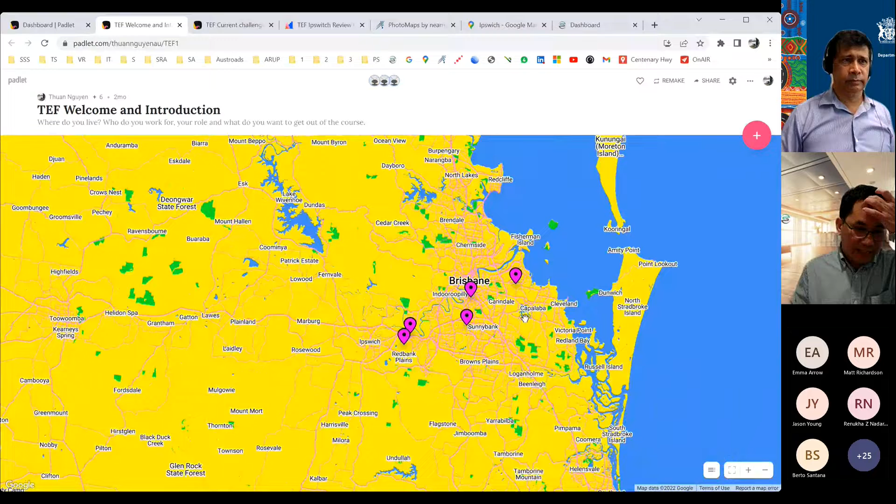So is everyone okay with that? Can you see my screen, and are you able to go in there and click this plus button? The majority of people are around Brisbane, which is great, because some of the topics we'll be talking about today will be relevant to your day-to-day work, to where you live, and what you see.

So we're looking forward to a lot of contributions from everyone throughout the sessions. In terms of discussing topics and questions, you can do it either via the chat screen - Emma, Rohit, and I keep an eye on it - so feel free to put questions there, or you can raise your hand as well.

Let me go back to my Teams. So when you raise your hand, we'll be able to see it, and if I don't, I'm sure Emma will remind me. Then you can talk about the topic or ask any questions you have.

Okay, so I see someone from, what is this place, I've never been here before - Cloncurry, is it? Cloncurry, there you go, near Mount Isa. No, I've never been to that part of Australia. Have you, Rohit? I haven't, but it's a good place to go, I hear from my TMR engineers out there. They keep asking me to come out there in the middle of summer. Okay.

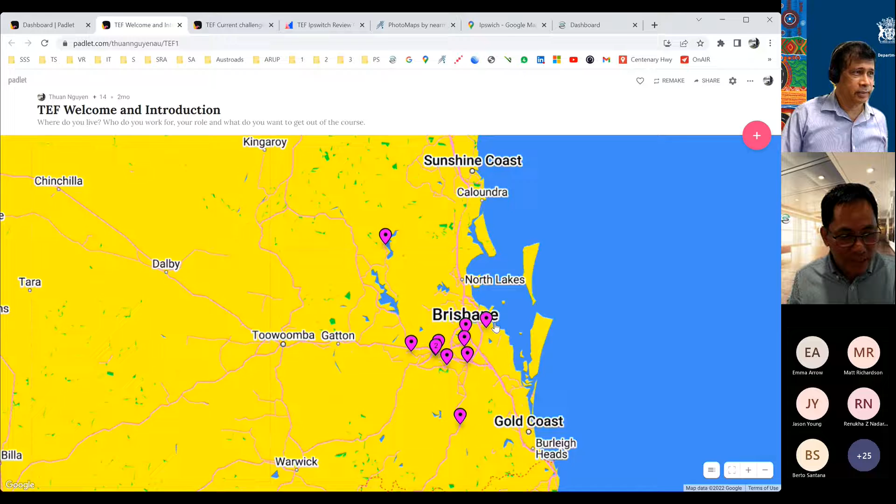So we've got Cairns, Cloncurry, and the majority of people living around Brisbane, north and south as well, which is great. So I think if I click on the icon, I can see more information if anyone typed.

So we've got Ben, the principal engineer working at Ipswich City Council. Yep, refresher of all traffic engineering basics, and it's good. Welcome.

Let me start off with maybe up north. Justin, Technical Officer Engineering Services, Bundaberg Regional Council. Welcome.

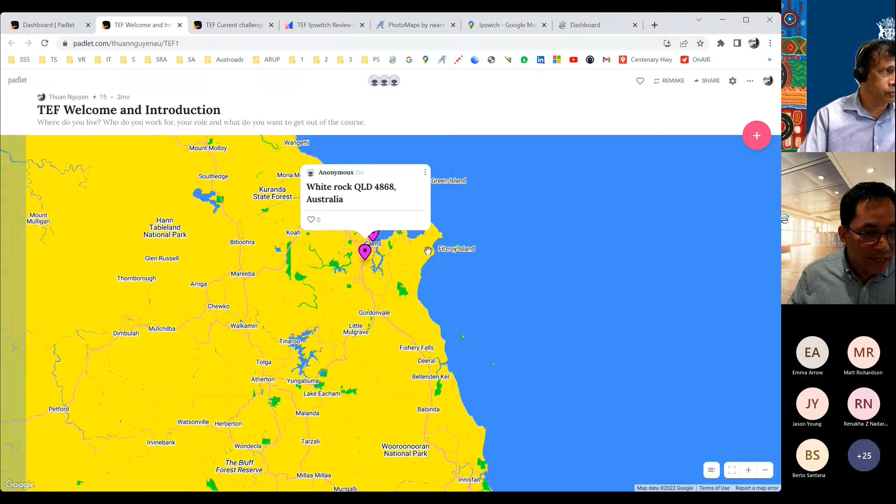We've got two people from Cairns. You didn't put in your name, so I don't know who you are, but it's okay. We've got two people dialing from Cairns, so welcome, and the person over here. There's no name either, but it's all good. And then someone up here, but haven't covered that. Yeah, Justin.

And then we've got people from down south. That's great, so we can see that we've got a range of people. We've got inspection officers as well, which is good. We want to hear some feedback from people on the ground.

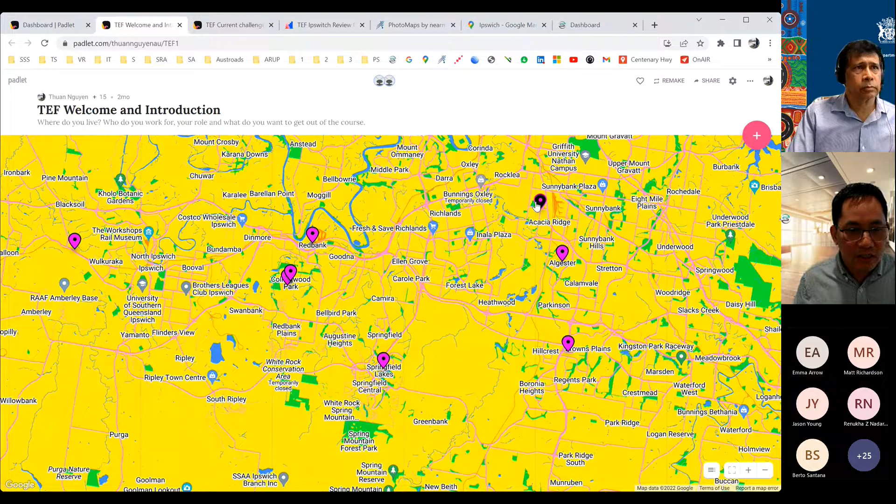So as I said, you can see that we've got a range of people living in different places of Queensland, which is great. And also your background is different because we want to share some of the experiences and observations that we see throughout the session. So that's great, thanks for that.

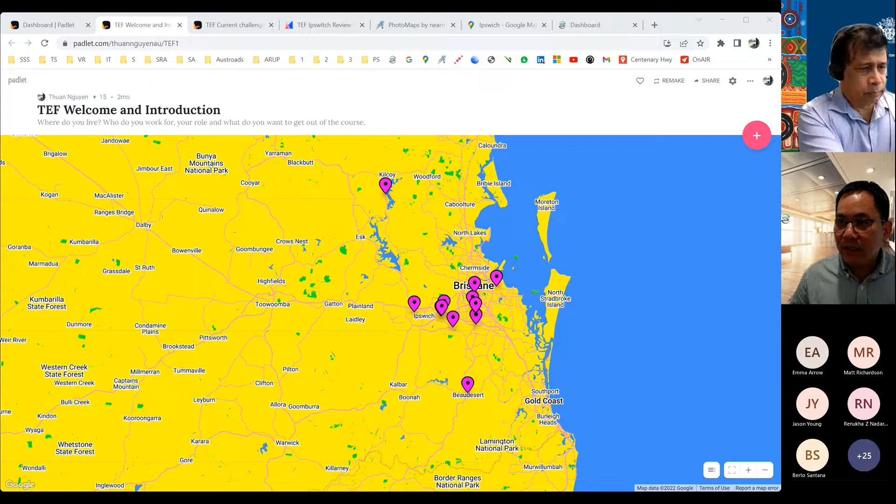So I'll leave the screen on. Now, another piece of activity I like to do is also have you tell us what are the current issues or challenges that you are facing. So let me go back and share the other screen.

Share window. Who's that one out of Kilcoy? Sorry, what was that? Sorry, what was that? Someone said something? Who was that person from Kilcoy? Okay, never mind.

Asanka, there you go, Asanka just put in the name there, so yeah. Well, there you go. It looks like a lot of people are curious about where you are at the moment, which is good, maybe one day we'll have a visit.

Yes, this is Northwest District in Queensland. We have a TMR office here in Cloncurry. Here I'm working as an engineer here.

Right, okay, that's good. What's special about that place? Anything special that's worth a visit? A little bit hot in this area in the summer. Yeah, there's some mining you can visit and cattle farms and those kinds of stuff. Right, there you go, thanks for that.

Well, so you guys from Victoria should go and hold a session there in summer. I don't think we want to be there in summer, Rohit.

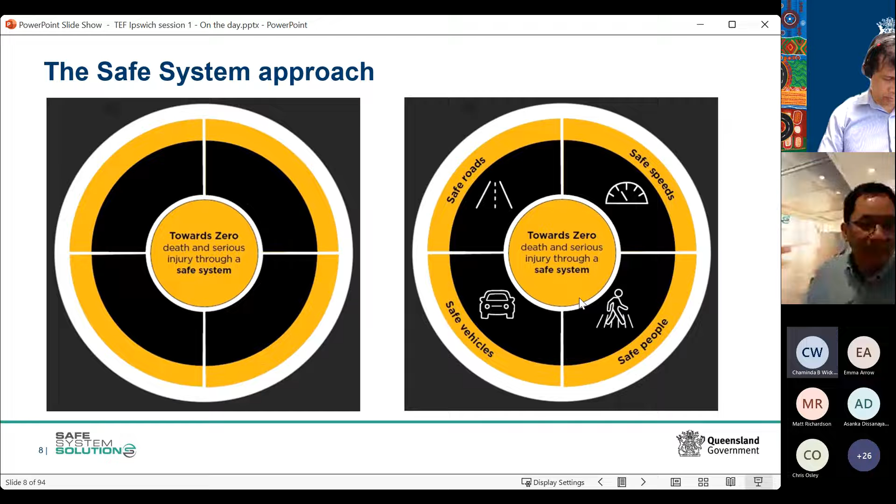So those are the 4 principles that jurisdictions and practitioners try to work towards, with an overall objective of reducing the number of deaths and serious injuries on our roads. Another premise about this safe system is recognizing that people, humans like ourselves, make mistakes. And when using the road network, the road system, people will make mistakes, and the result depends on circumstances. But we don't want people to sustain an injury that is unacceptable.

So there is that duty of care, to an extent, to make sure that for the people managing the road network, which I assume most of us are, we are aware of these principles so we can achieve that objective. I'm not going to read them out, but we know that as humans we're actually quite fragile, and we might not realize it, but when there is a crash, in particular involving high speed, our body cannot sustain much injury at all.

What else is there on the screen? When we design or manage the road network, for those who work in maintenance for example, we've got to be aware that we must make sure the road environment is safe. In terms of signs and lines, they contribute to the safer roads component, in particular because they are part of the road network, what people see and use. And the last point there talks about when we manage signs and lines, we've got to make sure it's clear and consistent to help people navigate the road network.

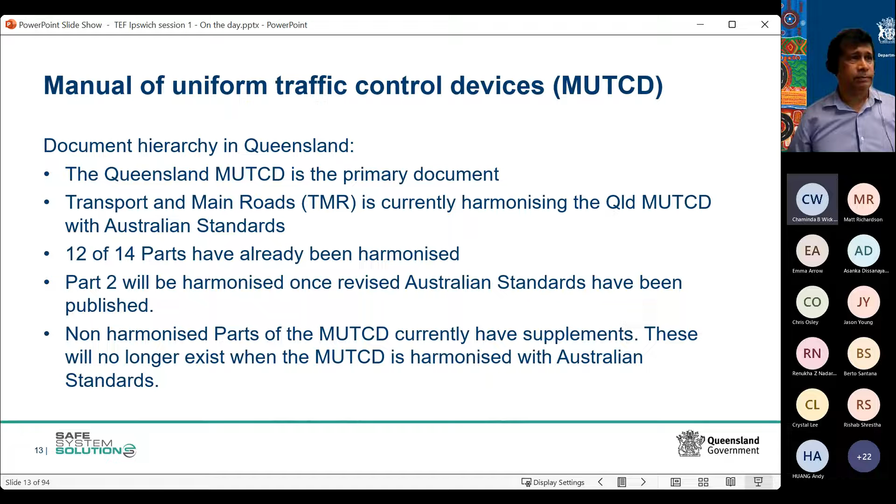So the signs for use in Queensland, or not to be used in Queensland, we've listed down in our Part 1, and the harmonized bit basically says which ones we've accepted for use in Queensland. There are certain ones where we've just said not accepted for use in Queensland, and one example that comes to mind is left turn on red after stopping. I think the only trial was given to the City of Gold Coast and Brisbane City Council, and after the trial they've removed the signs.

Signs specific to Queensland, we've got two numbering systems. We've got the TC sign, which generally gets issued for use just about anywhere. We also have the MUTCD Q series sign, and the Q series sign is just what we call a derivative of an Australian standard sign.

We do have an Australian standard number, and we try and link it up to the same number. For example, the keep left sign is the R2-3 sign, which is your normal 450 by 600. We find, particularly with councils, where you've got very narrow medians, you're not able to put the wide sign, so we've got some narrow signs where keep left is written vertically. Those ones have been issued a number like R2-3-Q01, and if we have another variation, we'll give it a number Q02, things like that.

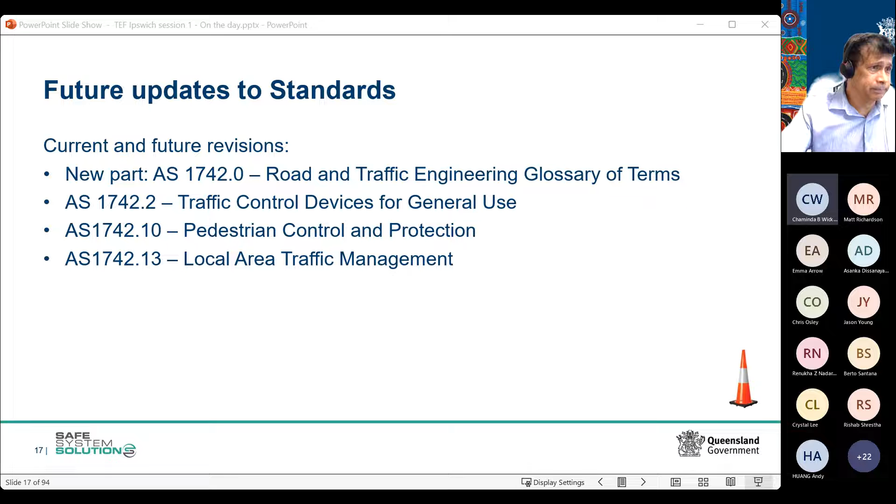So accessing the TMR documents now - Thuan, this is where I'd like to present from my screen, rather than going through there, it'll be an active thing. I think you can just click the share button - just click, right? Where's the share button? Up top somewhere. Share, there you go. Yep, share. And I want to share that screen. Okay, alright.

So not the internal users from TMR - this is external users when you come in. This is the internal users of TMR, that's what they see. So I'll just get onto the TMR external website for those who would be working for councils and industry. All our documents, if you haven't been there, it's very straightforward. We go to Business and Industry, from there there's a whole lot of things, but we do have a tab for technical documents. You access our technical publications, there's a whole lot of documents here. I'll go through mine first, which is traffic.

We have some registered products, for example road edge guideposts, RRPMs, and the like, and they're all listed in here. This means sign sheeting, for example - these are products that meet the various TMR specs or Australian standards for which Australian standards exist. You can use the products listed here knowing that the product suppliers have demonstrated compliance with an Australian standard or a TMR specification.

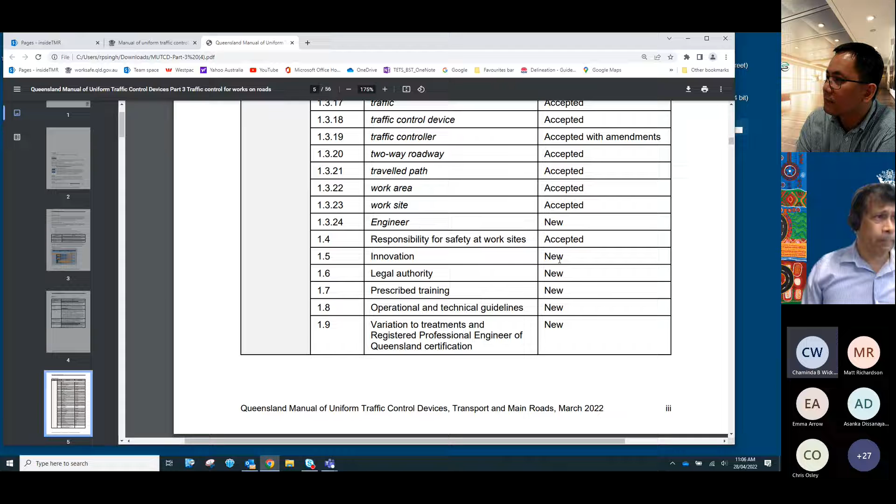Anything about innovation, the legal authority, any training - because we do have different training here in Queensland for people who work on roads, and how we vary treatments using RPEQ certification. These are new things, not accepted, meaning we don't have anything written in our standards for that, and it's a new thing. So there's a whole lot, yeah.

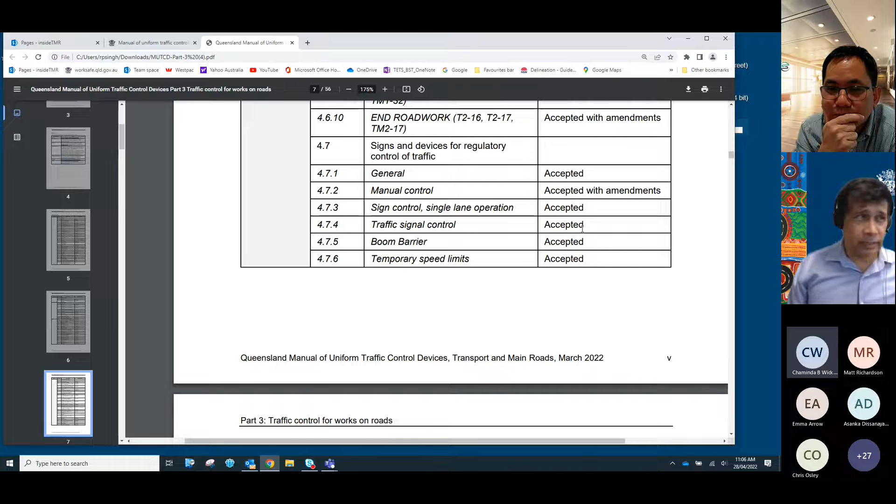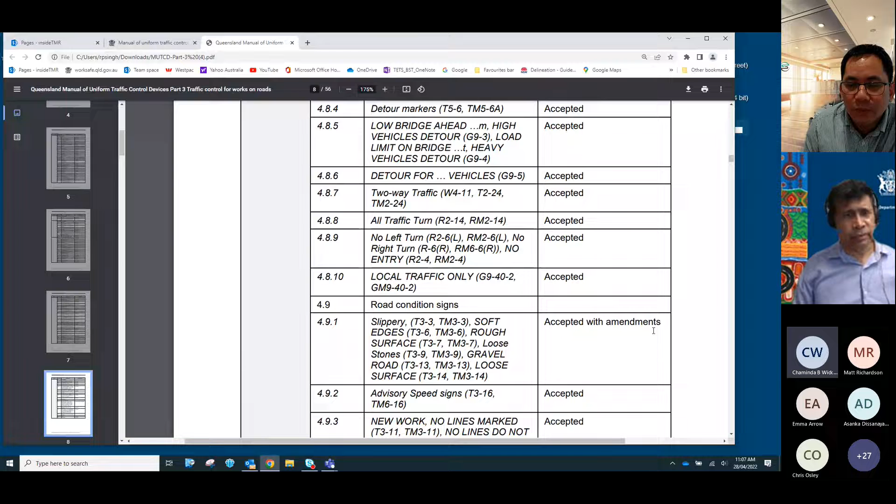So if we've accepted something - let's say this clause 4.7.4 - and in the Australian standard, if clause 4.7.4 then makes reference and says, for more information go and look at another clause, it means you have to go and look at the Queensland MUTCD to make sure we have also accepted the referenced clause, because there may be things that reference a clause where we do have some amendments. It's a little bit cumbersome, but that's just the way we could manage it.

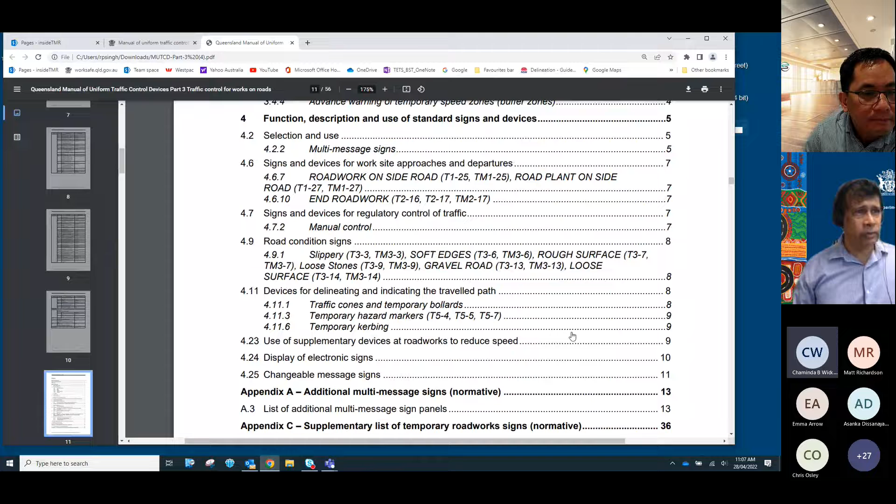So that's the documents, and you'll find that our Queensland MUTCD is very thin, because the only thing listed in the Queensland document are the departures from the Australian standard, and everything else you have to go and see the Australian standard for.

Okay, getting back to this one. So that's where our documents are kept.

For questions, we have a link here to the trafficengineering.support mailbox, which is looked after by my team. You can also subscribe to receive email alerts. During the publication cycles, if we update any of these documents, if you've subscribed to receive alerts, you'll be notified which document has been amended or what's changed on this page. Even if we make changes in this little text box, you'll be notified.

Okay, so that's all our traffic engineering stuff in there. I'd encourage everyone to go and have a look at that one.

For those who are keen cyclists, there's a whole lot of pedestrian or cycling guidelines in here. There's another team within our traffic engineering team, a team leader, Mark McDonald. Some people may have been communicating with him, but you'll find a lot of information relating to pedestrians and cyclists, active transport users.

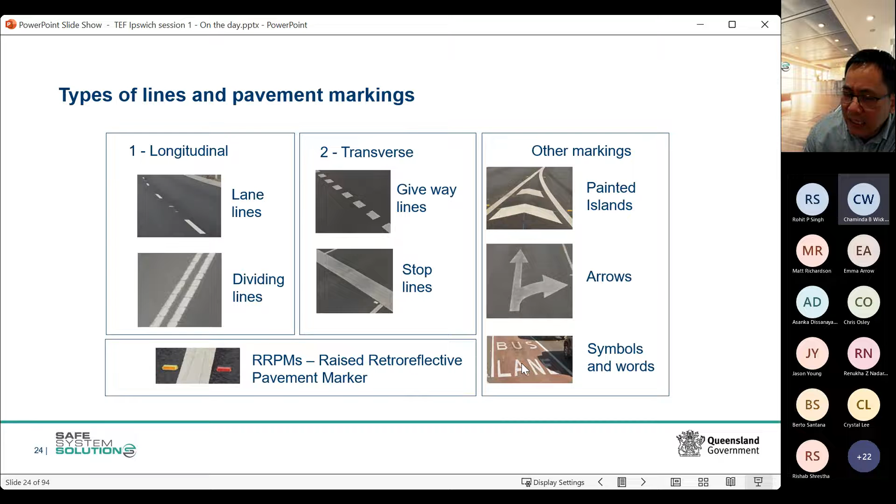In terms of pavement marking, we also have various types. You've got the longitudinal type line along the road. You've got the transverse type at give way and stop signs. You've got other types like the painted island, the arrow marking, a special use lane where there's a bus lane, bicycle lane, that type of lane. Also RRPMs, raised retroreflective pavement markers, providing delineation to motorists, which I think next week we have a few slides about in terms of the standards and color.

Now this photo here, I took it myself. Anyone notice anything not quite right in this picture? Feel free to put it on the chat screen. It'll be subtle, so I'm not sure whether people can pick it up. Anyone?

I took this photo, I think, in Rockhampton sometime, not last year. The gate - what do you mean the gate? The gate there? Yeah, no, that's all right. That gate is provided so that the landowner can go in there and maintain the grass. The size - no, not necessarily the size. Should be at least two more of the same. They could do with more.

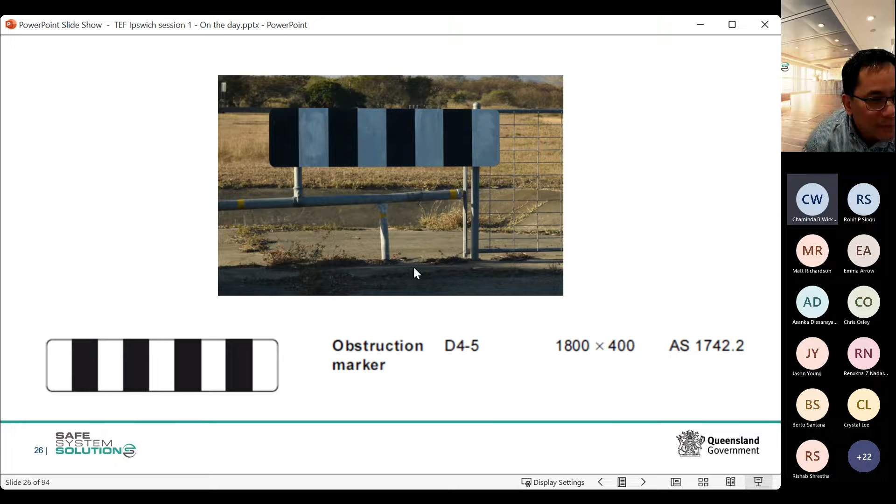But actually what's not quite right is if you look at that hazard board, for those who know the standards - and it's a bit tricky, this one - the standard sign should actually have another white panel at the end. So for some reason, one of the questions I've seen from the Padlet is what sort of common errors we see out there. They vary, and some of them I'm scratching my head about, because for this one here, I just don't understand why whoever - council I guess - when they ordered the sign from the manufacturer didn't supply the full sign. It's just missing one panel. Is it because they're trying to cut costs, less aluminium, or whatever reason? But Australian standard and MUTCD clearly say it needs to be 1800 by 400, with 4 black stripes and 5 white stripes, but there's only 4 here for some reason. So these are the sort of peculiar things you see out there in the road network.

So in terms of signing principles, there are 7 C's that we try to share: conspicuous, clear, comprehensible, credible, consistent, compliant, concise.

I'm not going to explain each one, but those are the objectives or principles we try to get to when we manage, design or maintain the road. I mentioned this a few times, it's got legal significance. You've got to make sure to comply with standards.

Now, a few other notes on signs. Throughout my career, I know that a sign is the first thing engineers or practitioners often rely on to solve a problem, because they're relatively cheap in terms of coming up with a solution. But remember, only use it when there is a demonstrated need. Overloading drivers with too much information will dilute the intention you have, and a lot of problems you can't really solve by putting up a sign.

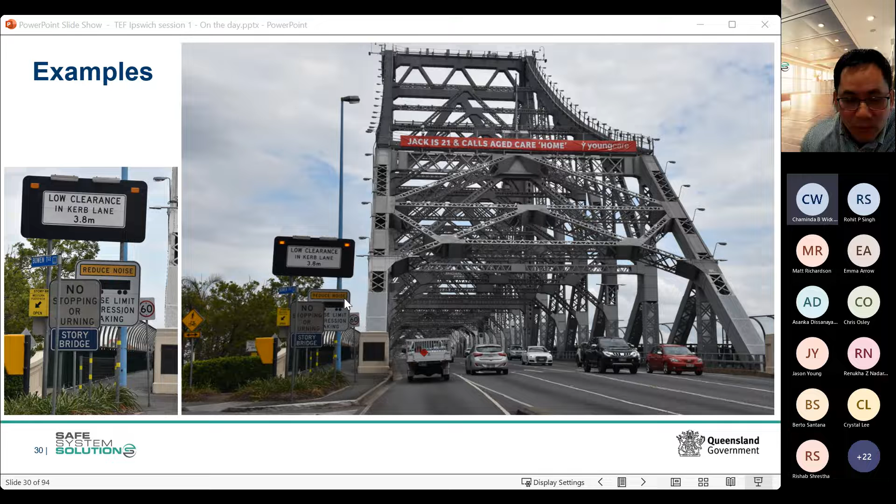All right, now this is an interesting one. Some of you probably know this location, but I'll leave this one on the screen for a minute and see whether anyone picks up anything unusual, wrong, or not quite right in this image that I took.

On my screen the image is a little bit small, but I assume on your screen you can zoom in, and you got the PDF here now anyway, so you can zoom in and have a look.

I mean, now you see it, the next time you drive through this location, you will see the signs still there. What do you think? For me, it's fairly confusing, and it could be quite dangerous, because if a truck driver is 5.1 high, for example, and the person is new to the area approaching this location, and the driver sees two different messages, what should he or she do? Do they stop, or do they just take a risk and go straight through? So again, to me it felt that one of those signing principles, which is probably credibility, it's probably lost here. It's not compliant, perhaps even. So I still don't know what the story is, why there are two different values for the height clearance. If anyone knows anything, let me know.

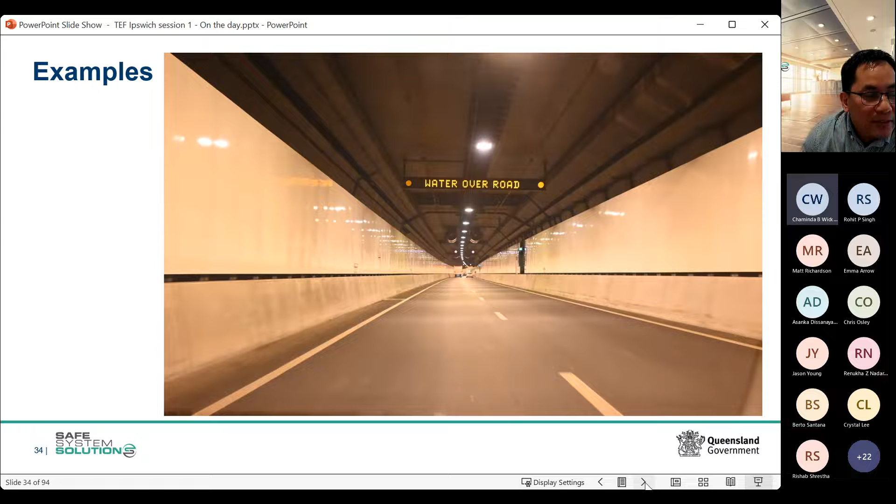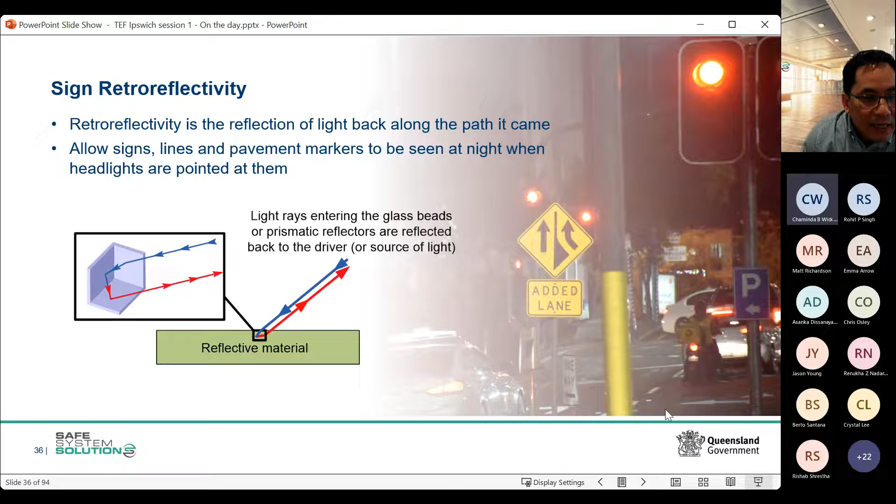Fortunately nowadays we have retro-reflective sign sheeting material, which most of you probably know. It's specially designed so that for car headlights, when the light hits the sign, it will bounce back and make it a lot clearer and more visible to drivers. There are different types as well. Just very quickly, there are 3 types that should be used. The most commonly used is probably class 400, that council uses for most signs. The class 1100 is more for motorway use, and class 100, which is the old class 2, is more for parking signs. Yeah, council will be using a lot of those as well.

All signs, when you order them nowadays, offer 15 years warranty, so within that time they should be performing quite well. But as we all know, these signs are placed out there much longer than 15 years. There are always budgetary constraints for those who work in the maintenance area, but it's a matter of prioritizing and trying to identify the critical signs and making sure they are repaired and maintained properly.

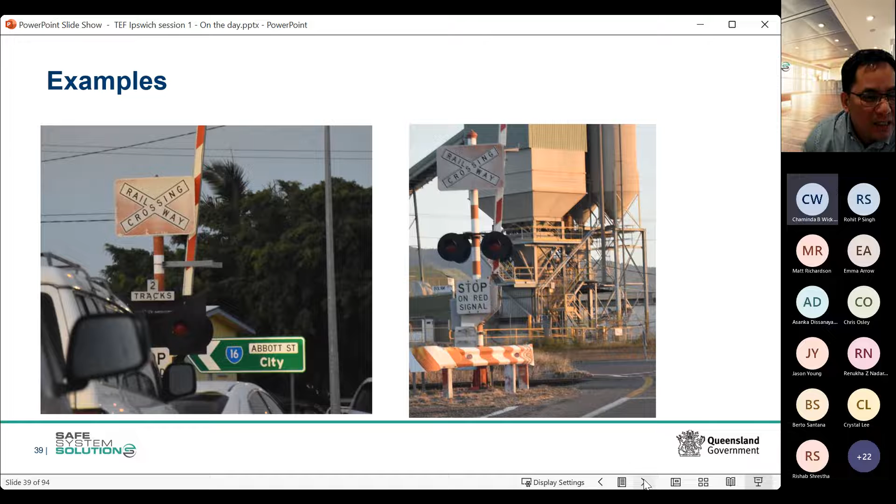I took this in Brisbane City Council - another example of people designing signs not knowing the right font to be used. It is important to use the right font because people may say, why can't I just use Arial or Times New Roman? But there is actually a lot of research and studies around fonts. In a lower speed environment it may not be critical, but on higher speed roads you want to make sure people can see and read the sign from a long distance.

The font we are using in Australia, we adopted the American font that they developed. A lot of these design standards are applicable around the world because we are all human - when we drive, we see the same thing. So we don't have to reinvent the wheel. A lot of the time we take leverage from other countries, the UK, Europe, or America, and we adopt some of the standards that they develop.

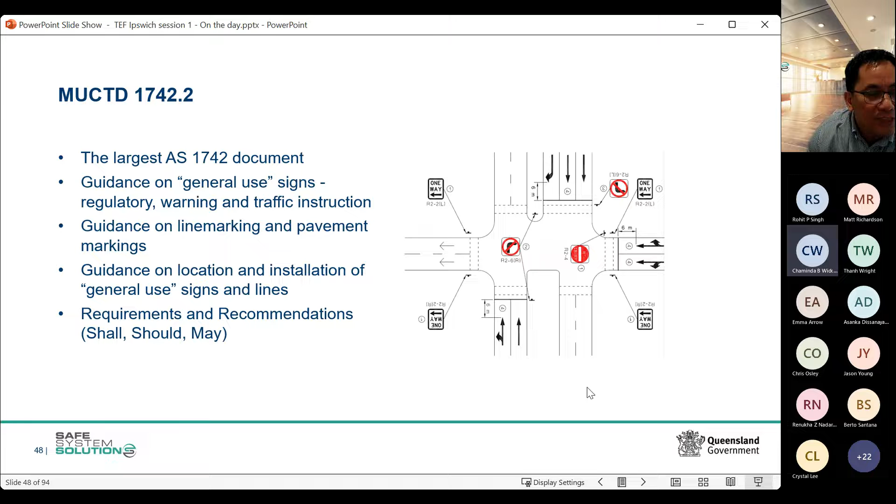So regulatory signs, warning signs in particular, are always on a yellow background. The use of these signs is in the MUTCD Part 2, which, as Rohit has mentioned, is under review, and we're hoping to get the standard published later this year. So keep an eye on that one, because this is kind of the biggest part, and it's the Bible for traffic engineering relating to signs and lines.

Purpose - again I probably won't dwell too much on this. It has regulatory meaning: if you fail to obey the regulatory signs, and there's a police person around, you'll end up with a fine, which is specifying the road rules. So it's important to follow them.

And there are different types, which I probably touched on earlier - you've got intersection control, movement control, speed signs, parking. Well, parking council manages that, so it's a type of regulatory sign as well. Anyone working in the parking group at council, let me know so we can discuss some of the issues around parking enforcement, which is always a bit challenging for council.

Intersection control - you've got give way, stop, and roundabout. This screen is worth quickly going through, because there's a few misunderstandings about the use of give way and stop signs. If you look at the MUTCD Part 2, it clearly says that generally all intersections should have a give way sign, and you only make it a stop sign if the sight distance is substandard. On the screen there, it shows how you work that out: you go back 3 meters from the intersection and check to make sure those two areas are clear of any obstruction.

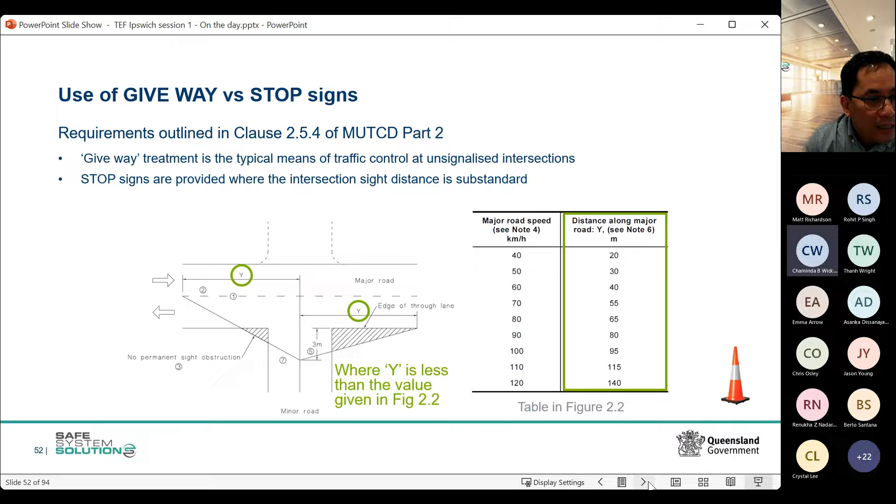That's just some more information. Look, I'll probably skip that little screen for now.

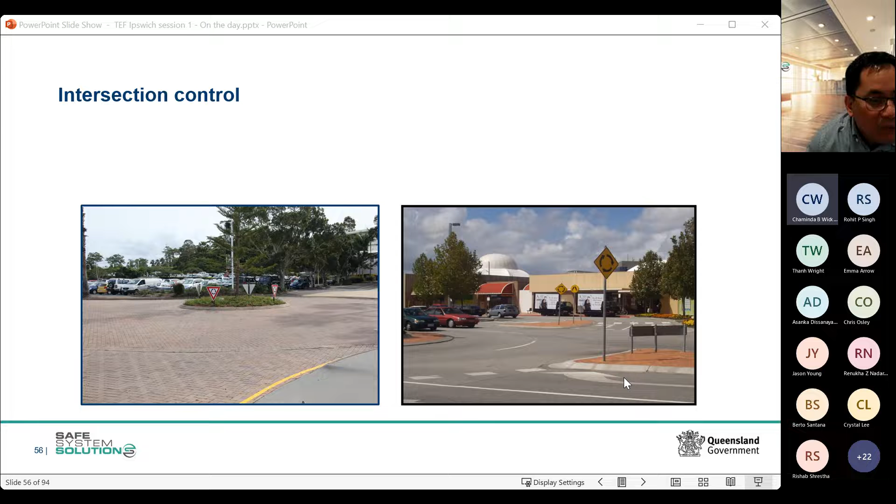So this roundabout sign is an intersection roundabout sign. It should be placed in advance of the roundabout as you approach it, not within the roundabout. And this is also wrong - this is a roundabout warning sign, which should be placed prior to approaching the roundabout, not at the roundabout. Council certainly mixed it up here. This regulatory roundabout sign should be placed as you enter the roundabout, not after, and there are other issues as well, like incorrect height and those sort of things. I've got a lot of these photos, and sometimes you're just scratching your head, not quite understanding why people do things a certain way.

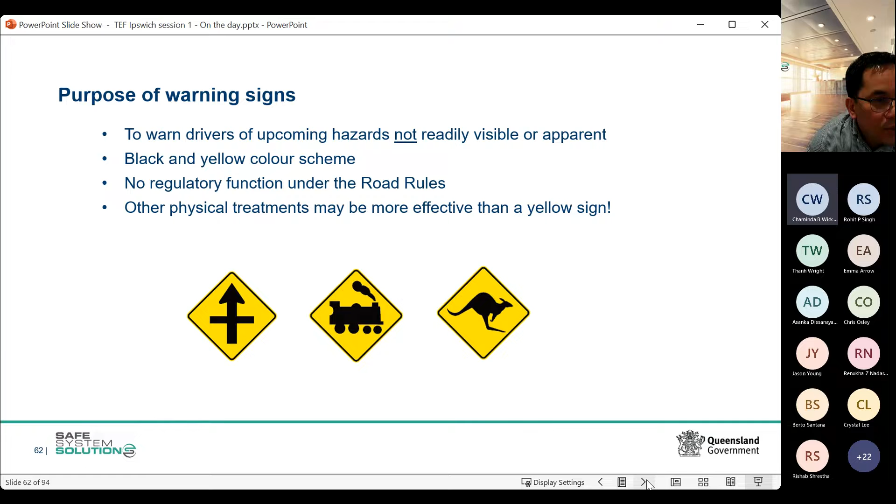Warning signs. I'll probably skip some of these signs since you've got them in your notes, just to show you some examples, because I'm conscious of time. We don't have to go through them all, we can continue some of these slides next week.

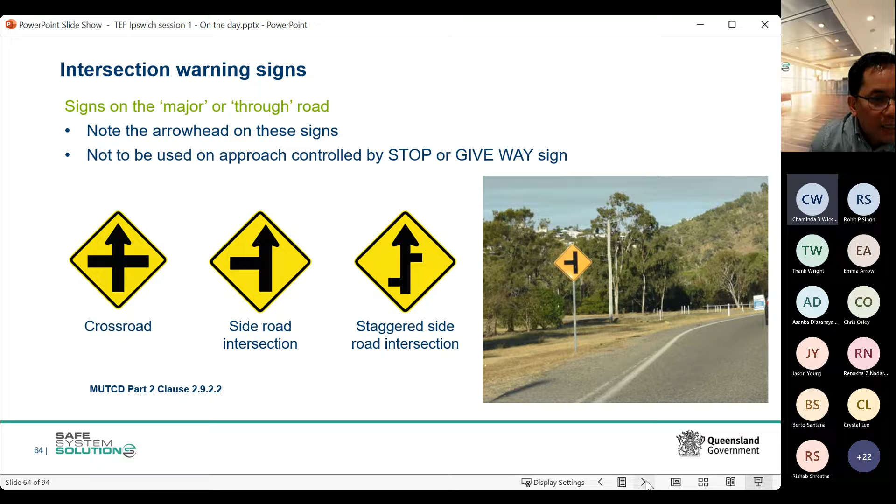Intersection warning signs - one thing to note is that this sort of intersection warning sign now has an arrowhead. Intersection warning signs, and you've got the cone there. I think I have a few more examples, and then we'll probably call it today.

I'll just double check. Yeah, I think I'll have a few more slides because I want to give everyone an opportunity to do a little quiz. Now this one here, I picked it up very recently, about four weeks ago. Can anyone quickly tell me what's wrong with it?

I was pretty surprised and a little bit shocked that they had this arrangement there. Anyone pick up anything?

So if you look at this approach, you've got an intersection warning sign with an arrowhead indicating that you have the right of way. But actually, you will be facing a stop sign. Yeah, Kevin is correct, the priority road is in the wrong direction. Absolutely, Jason and Kevin Tan as well. Yep.

Oh, hang on - warning on the electric pole? No, there's nothing wrong with having the sign mounted on the electricity pole, that's fine, the utility company is usually quite okay with that. It's more about wrong priority. To me, this is quite dangerous because looking at that sign, it's telling drivers that they have the right of way, they can keep going because the arrowhead is facing the direction of travel. But then technically you don't - you have to stop. And the fact that they have the warning sign or stop sign ahead indicates that there may be people not stopping. Maybe because of that sign, you send mixed messages - you have right of way, and then the next minute you don't. So I actually wrote to council, and in this case they were pretty responsive. They said, yeah, that was a mistake, and they're going to fix it.